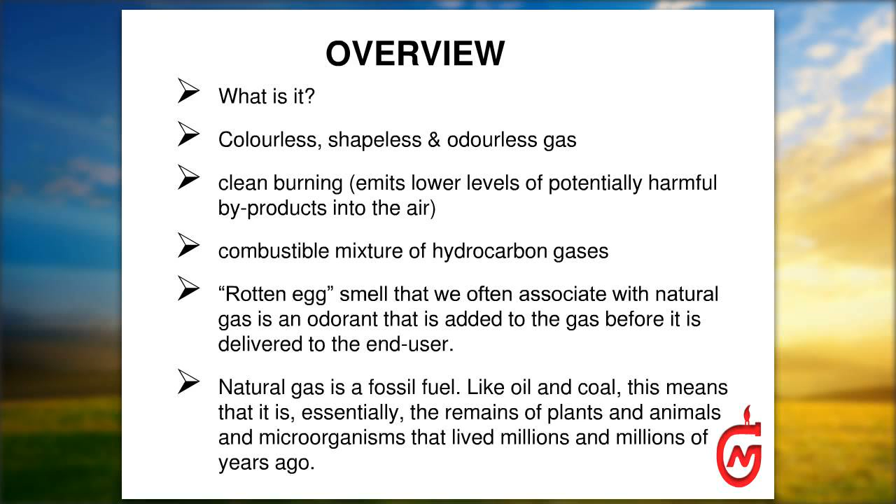If you look at your typical composition of natural gas, it's mainly made up of methane, which is pretty much what they use for downstream petrochemicals as the main raw material, either as a fuel to burn in the furnaces, or as a feedstock to create other products. And if you look at your other byproducts, you've got ethane, propane, butane, carbon dioxide, oxygen, nitrogen, hydrogen sulfide. You occasionally get your rare gases like helium, xenon and argon, but those generally exist only in trace quantities.

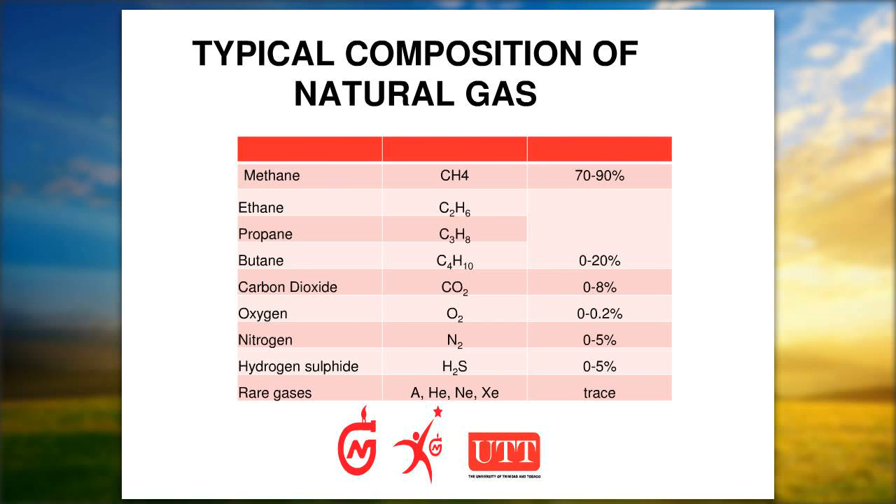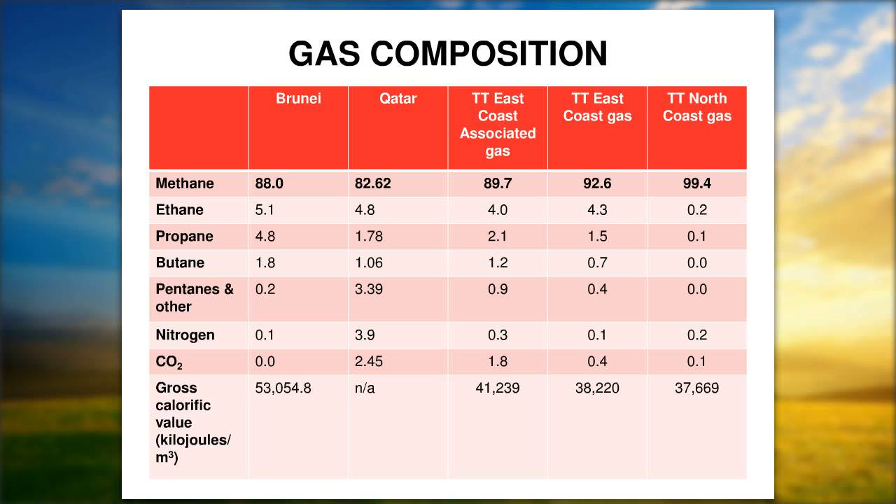Now, in practical terms, the slide I put up is pretty much stating that in different gas provinces, you tend to have a different breakdown of each component. For example, in Trinidad and Tobago, depending on where you source your gas, you can have a methane component of just about 89 to 90%, all the way up to just about 99%. And just to compare, we've put in two other gas provinces, Qatar and Brunei, and as you can see, the breakdown of the components are all different, but it's generally all natural gas.

In terms of the type of recoverable gas there is, we generally use two main categories. We have conventional associated gas, that is natural gas found with oil, or conventional non-associated gas, which is pretty much gas that you find by itself. In other provinces, you've got gas sourced from coal-bed methane, gas sourced from tight sands, and gas sourced from shale, and we'll touch a little bit on shale later.

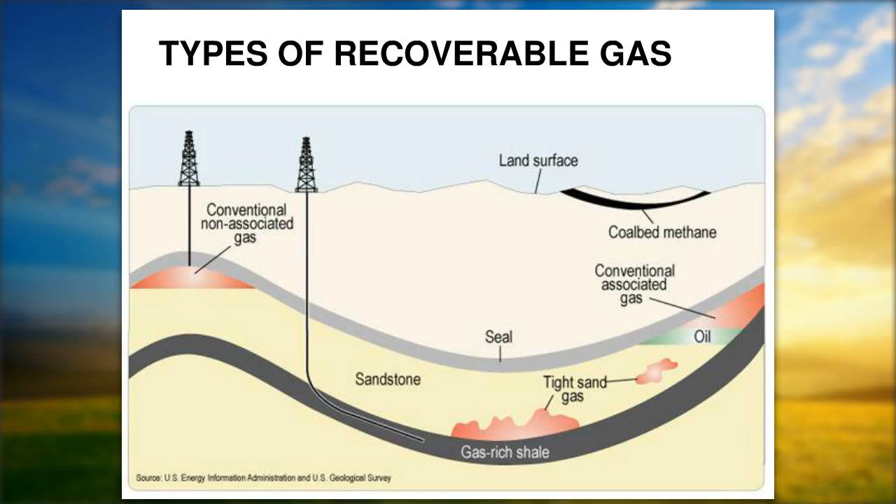In terms of just a general definition for shale, shale gas is generally natural gas that's trapped within shale formations, and as we know, shales are fine-grained sedimentary rocks that are pretty much rich sources of petroleum and natural gas. Your geologists and your budding geologists would really know this.

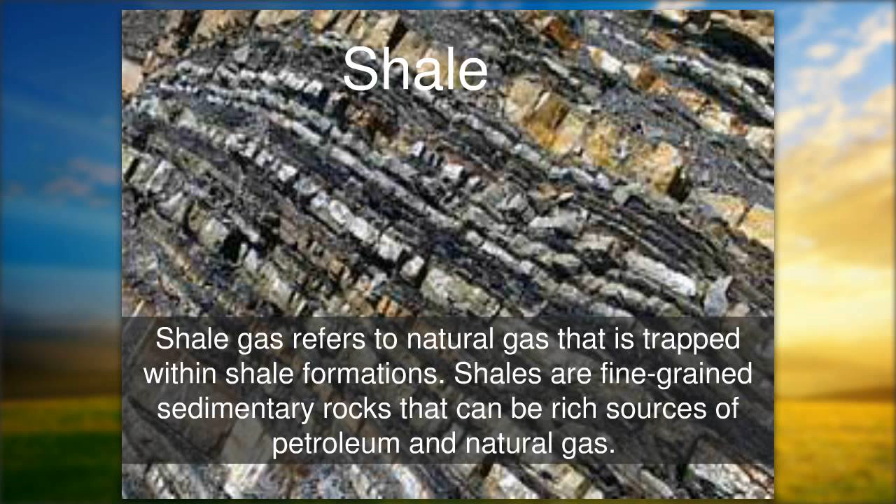And it's important because over the past 10 years, we've actually managed to figure out how to extract natural gas from shale. So as a result, in certain countries, a lot of natural gas production has increased based on output from shale. And again, we will get to that in a little bit.

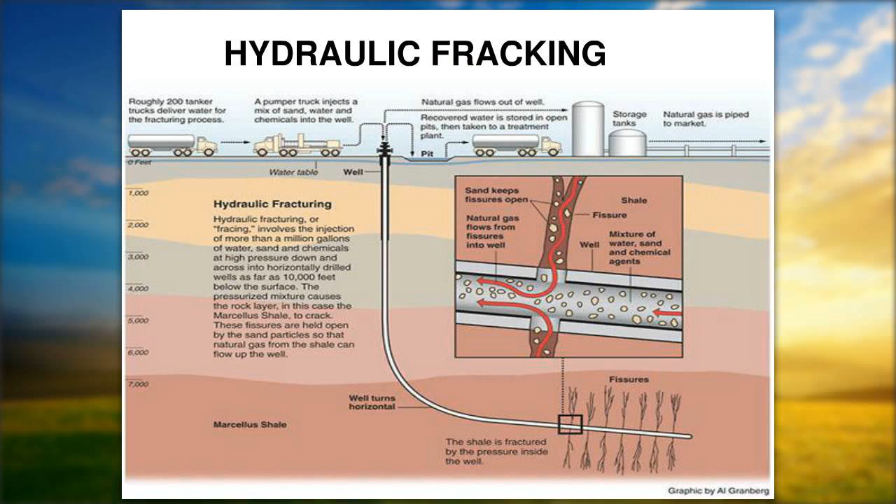In terms of hydraulic fracking, this is the main method by which shale gas is extracted. It's pretty useful to know, but it's not critical to know, at least not yet in Trinidad and Tobago. This can actually be looked up on a site like Wikipedia or any natural gas site, so I'm not going to go into detail on this.

Where is shale gas? Shale gas is generally found pretty much where you would expect to find natural gas. There are huge concentrations of shale in, for example, the former Soviet Union. There is some concentration of shale in North Africa. There is some in South Africa, some in Australia, some in China, a few deposits in South America, mostly Argentina and Brazil. And there are deposits of shale also within Mexico, United States, and Canada.

What they don't tell you is that shale actually requires a lot of water to be useful. So as of now, the only country that's really extracting a lot of natural gas via shale is actually the US.

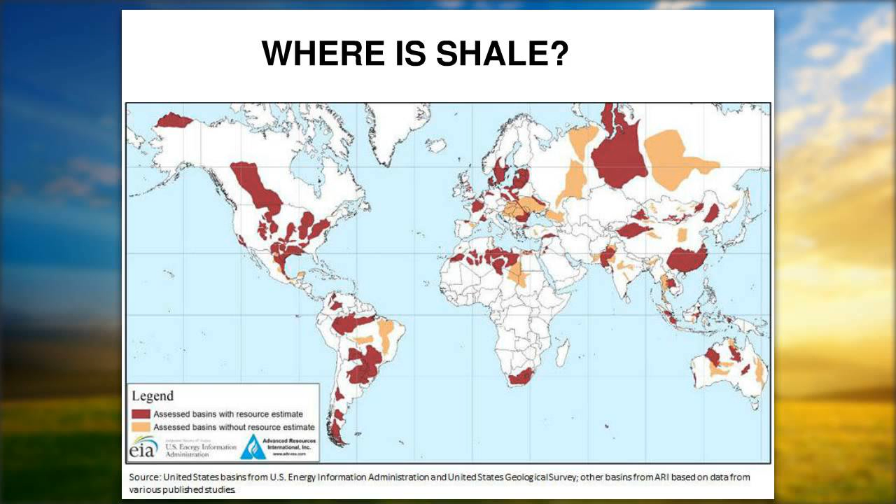And in terms of our global context, right now, in terms of resource production, we're less than 1%. We are just about 0.2% of the global total. And in terms of our reserves, just about 0.4 trillion cubic meters.

The actual figure is probably a bit lower because the new gas reserves numbers came out just last week, sometime after this presentation was completed, and I think we're down by about 7-8% from that amount. In terms of reserves to production in years, it's probably just about 12 years. There's been some adjustment in the numbers, and I'll get to that in a bit.

In terms of our reserves to production ratio, the biggest reserves are actually in the Middle East, pretty much in Qatar, and the least amount of reserves are in North America. In terms of our history, as gas use has increased over time, reserves have also declined over time. With the new shale reserves being used in North America, some of that decline has been to some extent reversed. And again, we'll get to that.

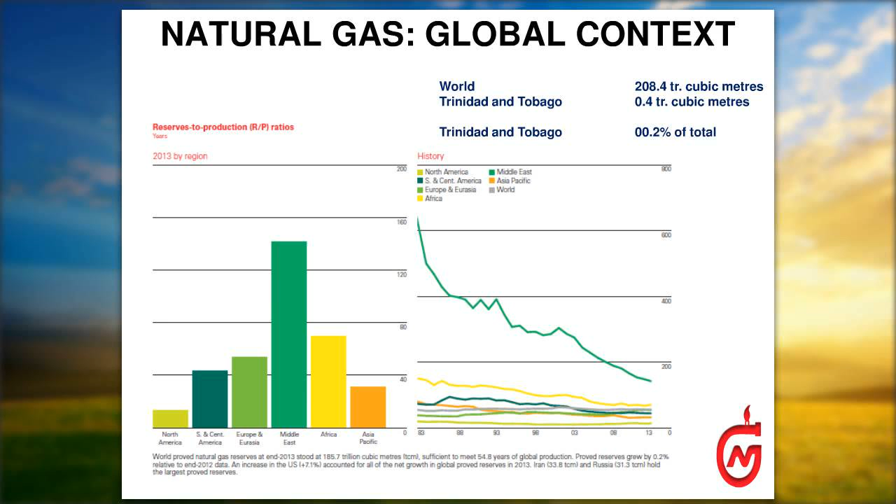In terms of the US, over time shale gas production has been increasing very significantly from 2005, and we're pretty much getting a geometric increase in shale gas that's projected up to 2040, with non-associated gas generally declining, with the methane remaining fairly stable, and associated gas remaining fairly stable.

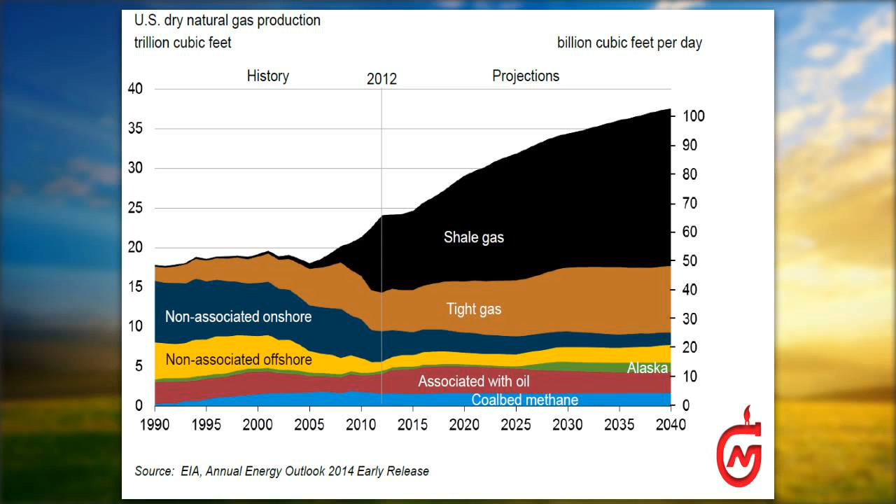In terms of overall production, North American production is also slated to increase over time, and probably by about 2015-2016, they will be in a net position, which means that they can actually export natural gas, which also has implications for us as well, that I'll get into in a bit.

In terms of our production and consumption, since natural gas in fact cannot be stored, unlike oil, generally what you find is that production pretty much equals consumption. And in terms of Trinidad and Tobago, we are responsible for just under 0.7% of global consumption, and that's because we've got a lot of world-scale plants that use a lot of natural gas.

In terms of world consumption, it's just over 3.3 trillion cubic meters, 3,314.4 billion cubic meters, of which Trinidad and Tobago is using about 21.7 BCM.

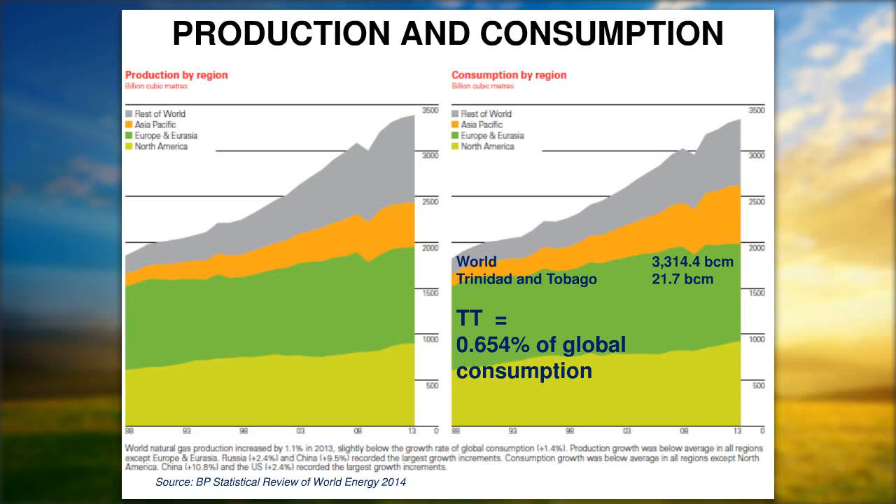And again, it's because we've got a lot of plants creating a lot of products based on natural gas, so we're using a lot of the gas. In terms of consumption per capita, we're pretty much one of the higher users of consumption per capita by virtue of the fact that, again, we've got a lot of full-scale plants and a fairly small population compared to other

countries. The other big users of gas are, in fact, the other big producers of natural gas, that is the US, Canada, Russia, and Saudi Arabia, and 1 or 2 other countries in the Middle East, to a lesser extent Argentina, Australia, Indonesia, Brunei. The big gas producers, the big gas exporters.

In terms of our gas generation, we do generate a lot of energy from gas. Pretty much number 7 worldwide in terms of our standard value, kilowatt hours of electricity generated by gas per person per year. As of the last time the survey was done, we were probably at number 7. Again, because we produce all of our electricity via gas, we've got a fairly small population, and for our size, we do use quite a bit of electricity.

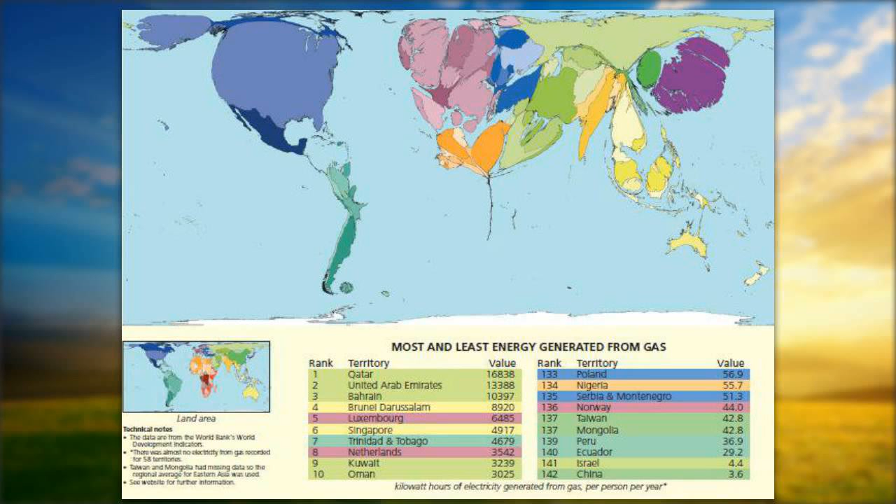And again, if you look at this, you can see that most of the countries at the top, with the probable exception of Singapore, are in fact big gas users, big gas producers, big gas exporters. Finally, just to put our resources in context, at the end of 2013, we had something like 12.4 TCF of gas, just about 0.2% of gas reserves, 1.2% of gas production, 5.7% of energy trade. We do export a lot of energy for our size.

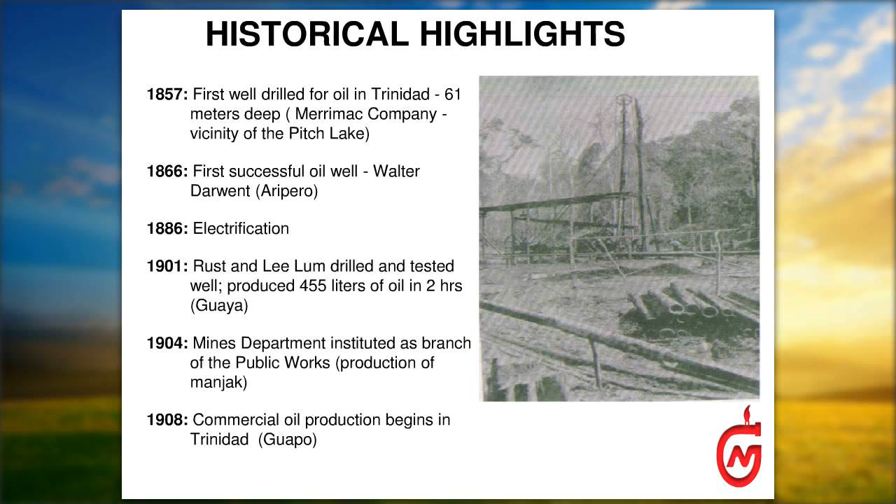I'm just going to go through the next slide. The next 3 or 4 slides are very quickly just the historical highlights of what we did and when we did it. It's going to be made available. I'm not going to spend a lot of time on this. It's generally just delineating the history of the sector. And yes, it is important, but my time is in fact quite limited. So you can always catch up with it when you get the presentation tomorrow.

Now, in terms of how the economy of Trinidad breaks down, it's always traditionally been what we call a dual sector economy, which means we've got one enclave sector that produces a commodity mostly for export that generates most of the economic value in the economy, and you've got another sector, the inland sector, where most of the people live, operate, and work, that does not produce a lot of value relative to the enclave sector. And for Trinidad and Tobago, it's pretty much always been that way since long before independence.

Traditionally it's been an agricultural product, whether it be tobacco, cotton, sugarcane, or cocoa. From about the 1950s or so, it became petroleum. From about the 1980s into the 90s, it became petrochemicals, and from 1999 to 2000, somewhere around there, it became LNG. What is it going to be in the future? We don't exactly know, but something else will come along.

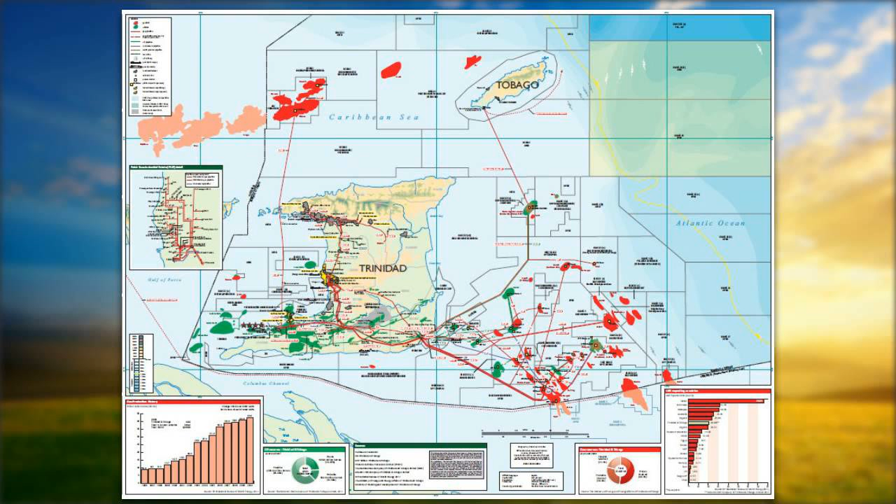Noting that there's a very nice discussion going on in the chats. Hopefully that will be recorded or captured in some way. It's also useful.

In terms of our growth in gas utilization, what's pretty much been the case is that for us, we tend to have jumps in gas use when there's a new gas facility available. So usually if there's a new petrochemical plant coming on stream, if there's a new energy plant coming on stream, you would tend to get a slight jump in gas use in the year, with a larger jump the year after.

What's been happening is that at least up to 2010, when the AUM plants came on stream, that model held. What's been happening since 2010 is that we've had reduced gas production from the producers for various reasons, dealing with maintenance and pipeline things after the Gulf of Mexico incident. A lot of maintenance and checking over of gas installations to ensure that that couldn't happen here, leading to some fairly significant reduction in gas output. What's probably going to happen in 2014, 2015, we should be coming to the end of that, so we should be beginning to see gas production heading back to 2010 levels.

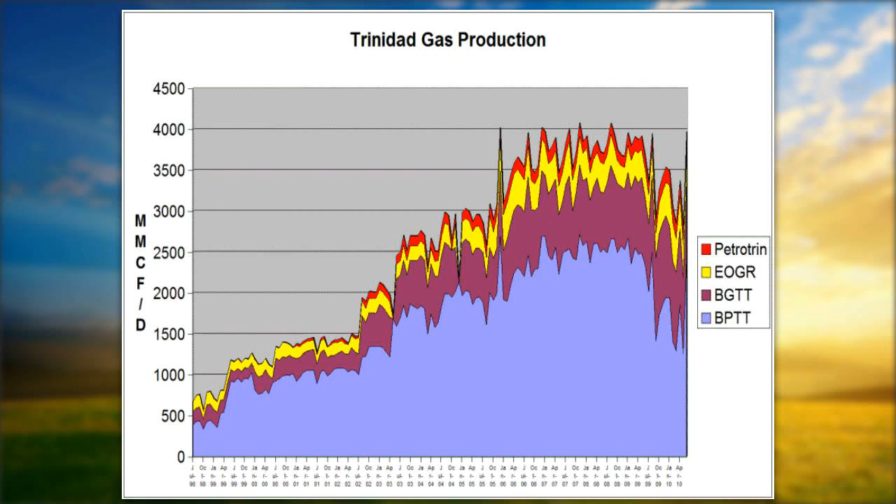Right, in terms of gas production, again, traditionally our biggest gas producer has been BP, followed by BG, and to a lesser extent EOG and Petrotrin. And as of late, there are other very small producers, Total, NGC, and whatever, and probably from late 2013 to 2014, NGC actually becoming a gas producer again based on our purchase of Total assets.

In terms of our reserve to production ratio, it's generally been falling. It's just about 12 years now. That's assuming that there's no additional gas discoveries, and gas production at current rates. And it's a fluid thing. If you find gas reserves, your reserve to production ratio is going to go up. If you produce at a greater rate or at a lesser rate, it's going to be adjusted. So it's not fixed. It's just a number at a fixed point in time. It's not an absolute number. It's not an absolute truth. And again, with increased gas use comes the fall off in gas reserves, which is to be expected.

In terms of the impact on the economy, however, energy per se has a pretty huge impact on the economy and everything except employment, because the energy sector, unlike most of the other sectors, tends to be very heavily capital intensive. Use of a lot of machines, you don't necessarily need a lot of manpower to do it. And where you tend to find your employment activity in the energy sector is in transportation, storage, communications, business services, that type of thing.

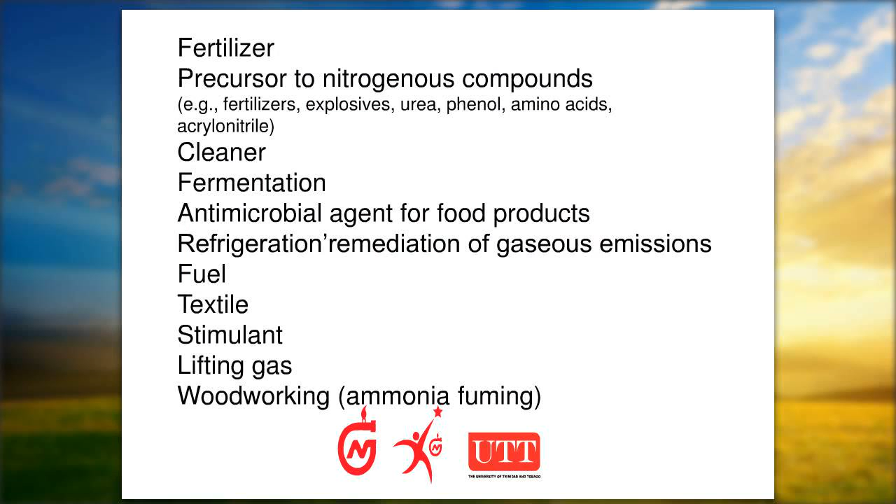So essentially, ammonia, 10 separate ammonia plants, and in terms of export, we are the largest exporter of ammonia in the world. Not the largest producer by any means, but we are the largest exporter. Right? As we know, ammonia is used for cleaning, used for agriculture, used for fertilizers, explosives, urea, amino acids, cleaners, antimicrobial agents for food products, refrigeration, used as fuel, used in textiles, used for woodworking, used as a stimulant, actually, sometimes.

And in terms of our local fertilizer companies, we've got Yara out of Norway. We've got a couple of local companies. We've got Tringen, which is actually still majority owned by the government. We've got PCS. We've got Point Lisas Nitrogen. We've got Caribbean Nitrogen, and we've got the MHTL AUM.

In terms of our ammonia trade, again, we're the largest exporter. We're closely followed by Russia and Ukraine. And depending on how the conflict goes, it will be interesting to see the 2014 number. Saudi Arabia, Indonesia, and the rest of the countries. What you should expect to see in the increase here is that you may see increases probably from the US or one of these other countries with low gas.

In terms of our prices, what's been happening is that prices have generally been climbing upward from about their depth in 2009. As of 2014, we're seeing a climb down from a small peak experienced early this year. We're probably coming down near the peak of the commodity price cycle, at least in terms of ammonia.

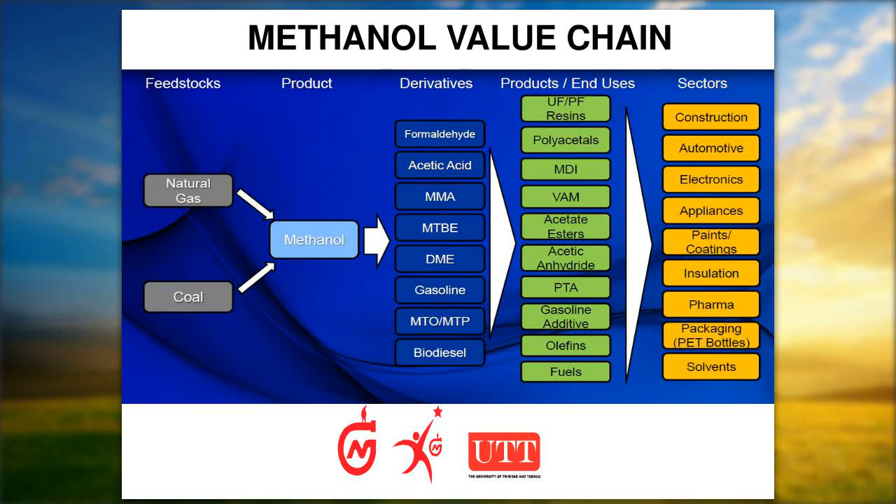What do you tend to make with things like this? Just fuel, gasoline additives, acetic acid, and it's generally used in plastics, that sort of thing. In terms of the sectors that it's used in, pretty much all the sectors: construction, electronics, automotive, appliances, paints and coatings, insulation, pharmaceuticals, packaging, bottles, plastic bottles, solvents, that sort of thing.

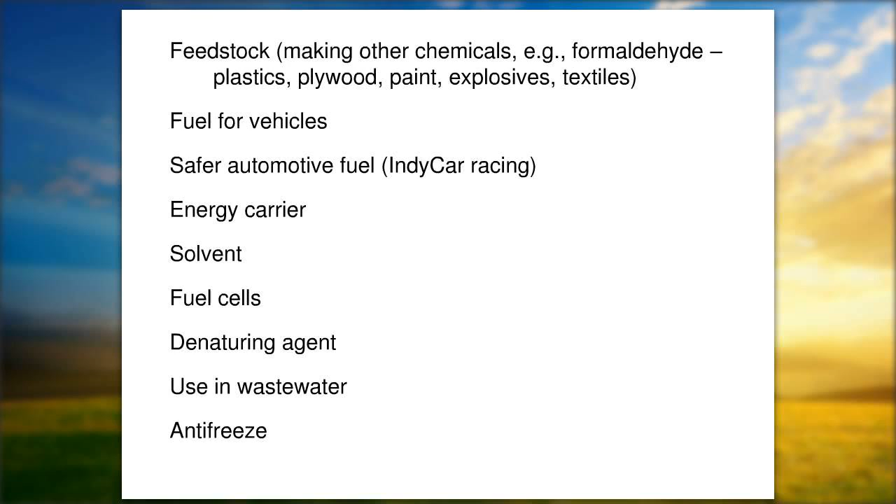Okay, again, uses. Mostly as a feedstock. You make other chemicals with methanol. Fuel for vehicles. Safer automotive fuel that is less explosive. It's also a good carrier of energy, so you can use it as a store for energy. Solvent. Fuel cells again. Energy. Denaturing agents. It's used in wastewater management. Used as antifreeze. Paints. Pharmaceuticals again. Silicone. Fuel blending, car bumpers, that sort of thing. Methanol has a lot of uses.

In terms of our methanol demand, we have numbers up to 2012. What's happening is that pretty much the biggest set of demand comes from China, and to a lesser extent in the Indian subcontinent. You've got some demand coming in from North America and Europe, but pretty much China. What happens in China influences methanol the most.

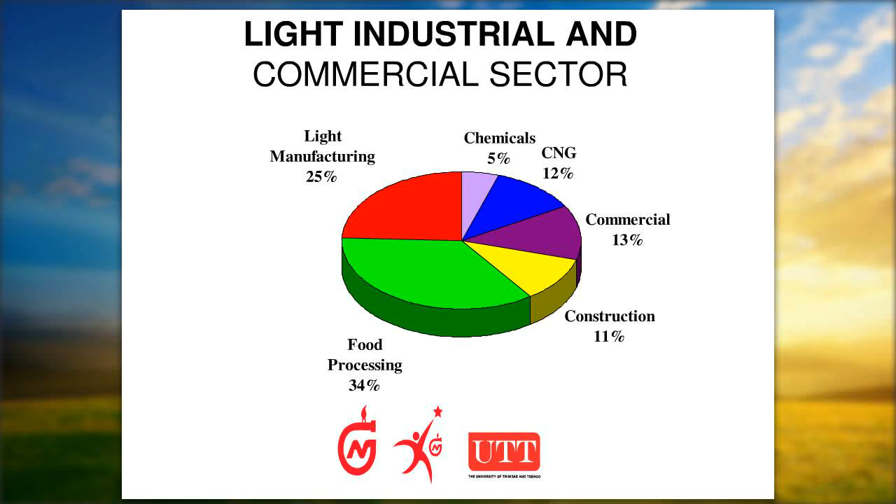Light manufacturing is anything that is not the big uses. Light manufacturing is like your bread making, your food manufacturing, that type of stuff. It's not heavy industry. It's not iron and steel. It's not the big things. And yes, natural gas is huge.

In terms of intermediate opportunities, this would be of more interest to people looking to go downstream of what we currently produce, which is basically methanol and ammonia. These are some of the downstream options that there are in terms of potential investments, and I'm not going to get into that so much. In terms of power generation, we started back in 1963.

T&TEC is generally responsible for a lot of our distribution, and we segmented the power generation capacity in 1994, where we sold off some of that generation capacity to a few other people. In terms of our independent power producers, we've got PowerGen, which is our biggest independent power producer. PowerGen was once part of T&TEC.

We've got a plant at Penal, we've got a plant at Point Lisas, we've got the big plant in Port of Spain, and we've got a plant at Cove Industrial Estate that just recently went into operation. We've got Trinity Power at Point Lisas, that's one plant, and we've got Trinidad Generation Unlimited at Union Estate in La Brea, that's also just one plant.

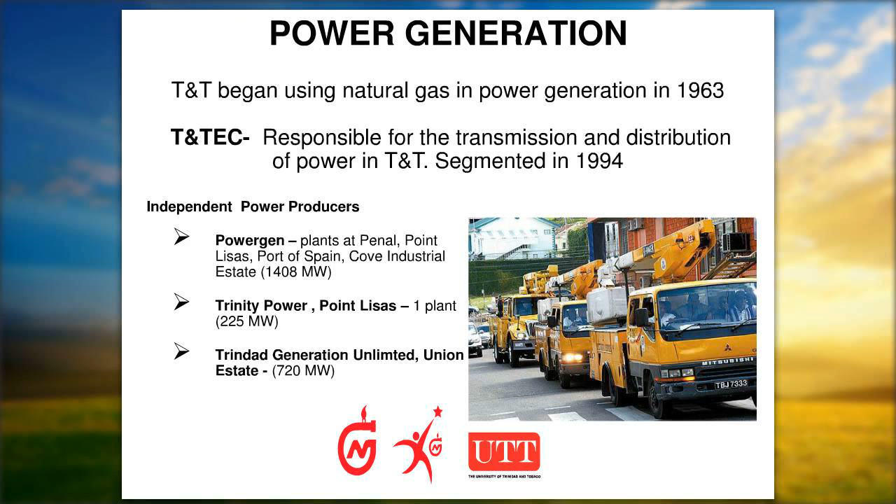Okay, and that's one. I'm just going to stop here for a little bit. In terms of Wade's question, in terms of local contractors providing services to these companies, local companies generally don't have to follow local content requirements. Foreign companies generally have one. There is actually a formal local content policy that was launched by the Ministry of Energy some years ago that foreign companies are supposed to adhere to. In terms of the construction stage, it's usually supposed to be about 20%.

And in terms of our local companies, we don't have any requirements, but I know NGC tends to be quite a bit higher than 20%. And the local companies benefit, probably not as much as I think they should, but again, because of the requirements of a lot of the companies, it's simply stuff that you can't produce within Trinidad and Tobago, so you have to import it. So, local content goes only so far.

Right. So finally, we get to the crown jewel of the gas sector, which is LNG, which is by far the biggest gas user, biggest revenue earner, and pretty much has had a huge impact on our economy since 1999. In terms of GDP, we actually have seen a slight increase in petroleum. LNG shows up in refining, so you've seen those increases in refining pretty much due to LNG. We have seen some improvements in financial, insurance and real estate services. We've seen some increase in manufacturing.

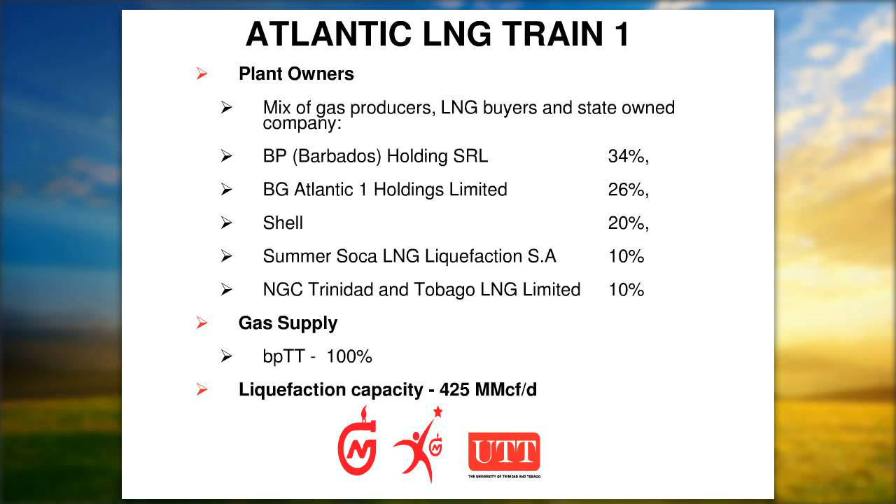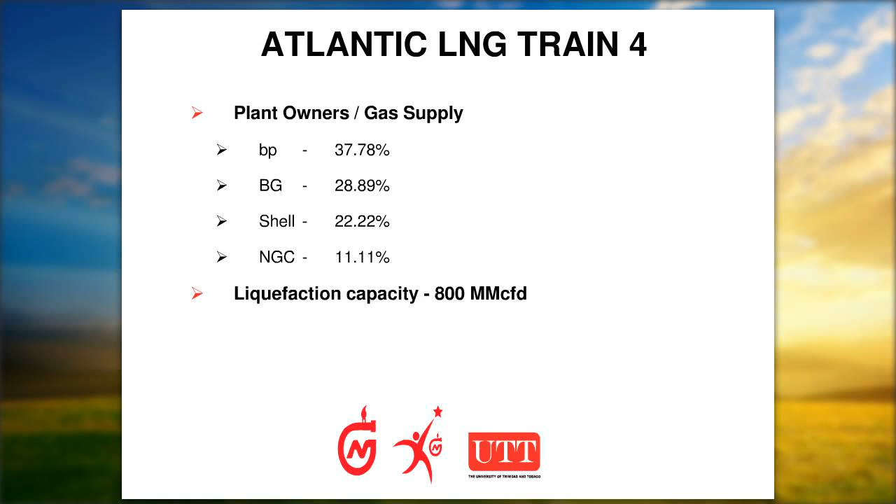In terms of exports by country, as of 2012, Trinidad and Tobago was number 6. I suspect in the intervening years from 2012 to now, Australia would have increased their LNG production a bit because they've got some projects going. Indonesia may have also increased a bit. Trinidad and Tobago should be roughly either 6 or 7, somewhere in the vicinity. We would not have shifted positions much.

And again, there seems to be quite an interesting discussion on local content going on there. Local content, in fact, should be implemented at the project stage and at the construction stage, which is where, in fact, you tend to find your biggest inputs.

What usually happens is that it's not law in Trinidad and Tobago as it is in some other countries. What usually happens is that we implement it in the agreements with the companies. So the companies do tend to have local content requirements that they are supposed to fulfill. And like I said, depending on the administration, they tend to be more or less strict in terms of how they make the companies comply, but it does exist.

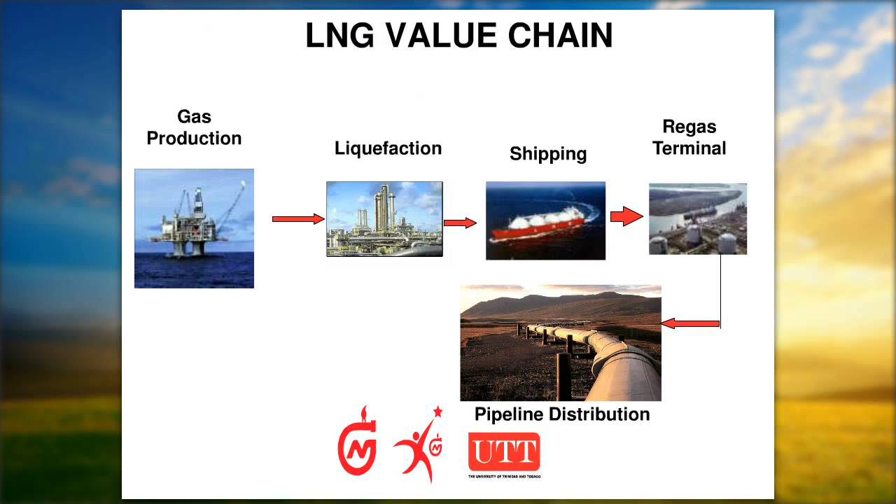And again, the LNG process also has a value chain, whether it be marketing fees or shipping costs or gas fees. Not going to go into that in great detail, because I think I'm running out of time. Again, this is the same thing. And I'm just going to leave you with some thoughts on the future. The best way to predict the future is, in fact, to create it.

Try not to put all our eggs in one basket. So, in terms of energy policy, do things like legislative reform, increase exploration and production, do deep water drilling, exploit heavy oil, exploit tar sands, increase oil production through enhanced oil recovery, heavy oil extraction, use of operatorships and farmouts to exploit marginal fields, rationalize things like your refining.

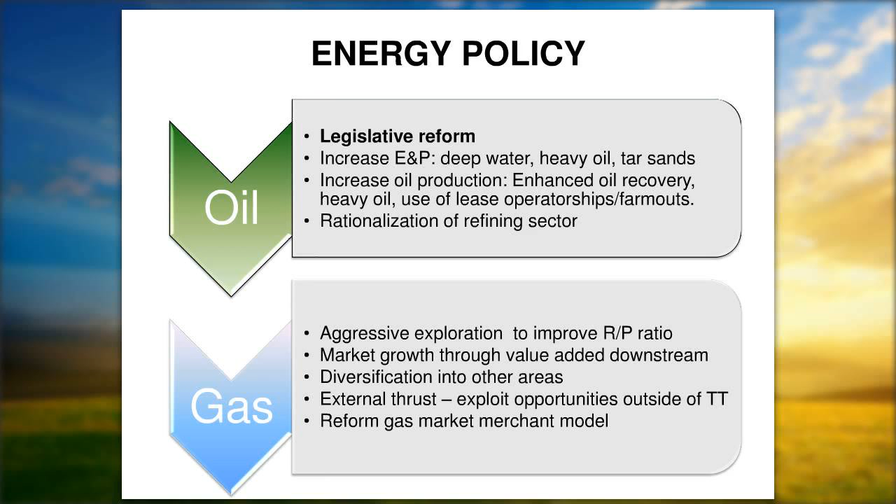In terms of gas, you would probably do things like an aggressive exploration program to increase your reserves. That would improve your reserve to production ratio. You would try to add value downstream by not just producing ammonia and methanol, but products downstream of that which would generate additional value. You would try to diversify into other areas, go outside of Trinidad, and try to reform the existing model that you derive value from.

In our case, if we want our reserves to go up, we have to drill for gas. And drilling is an expensive thing. We've got to attract investors to source the new gas, which is in fact in deep water. And we've also got to assure them that if they do find gas, there's a market for it. In terms of increasing activity in oil and gas, you would sign production sharing contracts, and I think they've actually signed a few over the last month.

We've got to do initiatives to promote drilling in deep water. We've got these initiatives going. We are reprocessing existing seismic data, creating new seismic data, doing new seismic surveys, new bid rounds. We're actually doing onshore exploration. We're doing things with heavy oil, which Trinidad has a huge amount of that we know about. We're doing fiscal reform. And in terms of energy services, we've got local content policy frameworks. We've established that since 2004.

Hopefully, we will have local content legislation that will help our services. We hopefully will help leverage things like exports. And hopefully, we can continue to do things like that. In terms of also interventions, we've got a few things that we're doing for that.

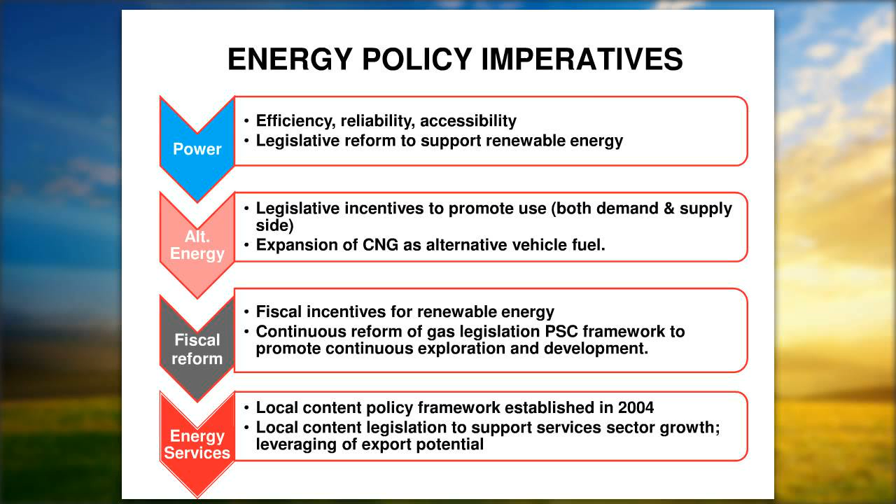We're trying to expand CNG. And we are also trying to do things in terms of power to support things like renewable energy and whatnot. We've got some things with some sustainability. We've got to ensure that the acreage is there. We've got to ensure that new projects are coming on at a regular rate so that we don't fall victim to the cycle, or we can even out some of the troughs in the cycle.

And we've got to, in fact, do things to ensure that local value added goes up so that the benefits redound to Trinidad and Trinidadians. In terms of bid rounds, we actually did bid rounds and we got some takers. We do have some E&P going on. We've got a seismic survey going on in deep water right now. There is more activity in the sector. We actually do have some development going on.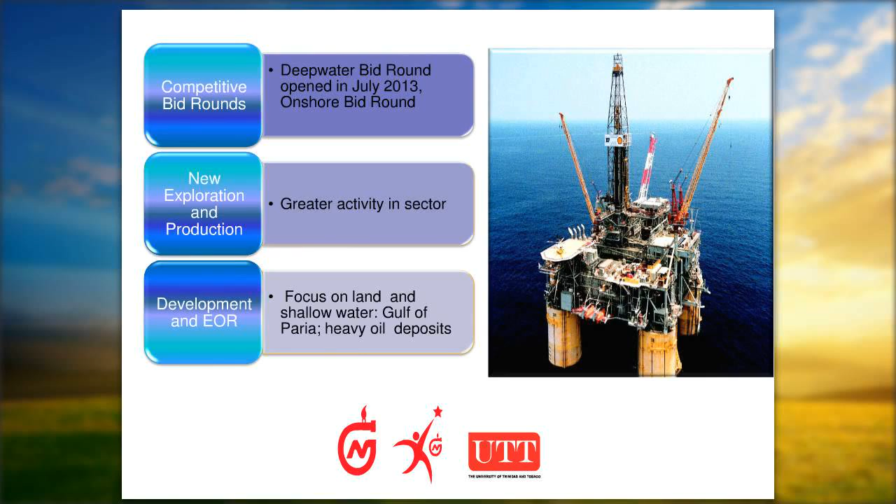Like I said, there are a bunch of heavy oil deposits that we don't do anything with, and those are available for exploitation. And in terms of the downstream, we can improve the criteria by which we allocate gas. Again, I'm just going to go very quickly now because time is of the essence. Basically, in terms of downstream, we will try to add value to petrochemicals. We will target process. We will try to link it back to the local manufacturing sector.

In terms of our global strategy, there's also opportunity outside. In terms of the Caribbean, we've got the pipeline to Barbados. We've got possibilities for small-scale LNG. We've got possibilities for CNG. There are opportunities in Tanzania, Mozambique, and Africa for those willing to take them.

And finally, we've got to be honest about the sector. We've got to, in fact, do our analyses, look at our strengths, look at our weaknesses, look at our opportunities available to us outside, look at the potential threats. Again, in terms of our strength, we pretty much got the Point Lisas model, which a lot of people like, and a lot of countries who are starting up their gas sectors want to adopt, because it's a proven and working model that can carry you up to a point.

In terms of the weaknesses, there is no cheap gas available. There is no cheap gas anymore. Gas prices have tended to be higher because the higher cost resources are now coming on stream. The tax structure is not as competitive as it probably can be. Our gas fields have been around for quite a while. Investment is critical.